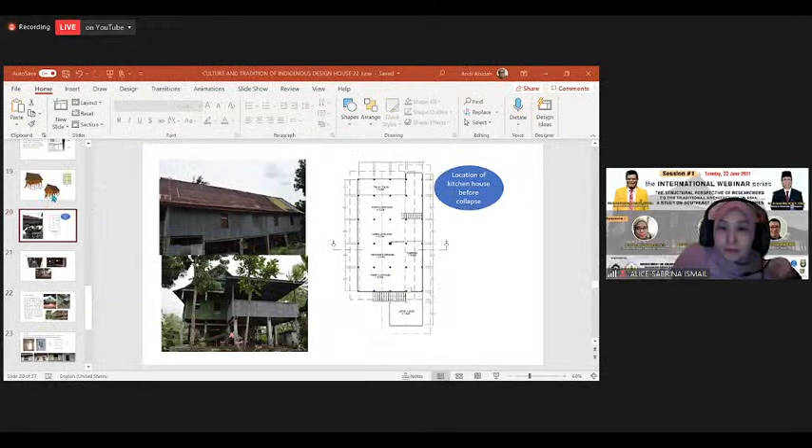Thank you, Professor Alice. Can you give me a star? Kelihatan, Ji?

Thank you very much. I would like to explain my research about the culture and tradition of indigenous house design.

This is Indonesia. Indonesia consists of so many islands and so many tribes. According to data from the World Bank, there are 1,300 ethnic and sub-ethnic groups in Indonesia.

This is Sulawesi. My research is about Sulawesi Island, specifically in South Sulawesi, in the locations of Soppeng and Kajang. I will compare two ethnic groups in South Sulawesi: Kajang Dalam of the Ammatoa Kajang tribes in Bulukumba Regency, and Bugis-Soppeng in Soppeng Regency.

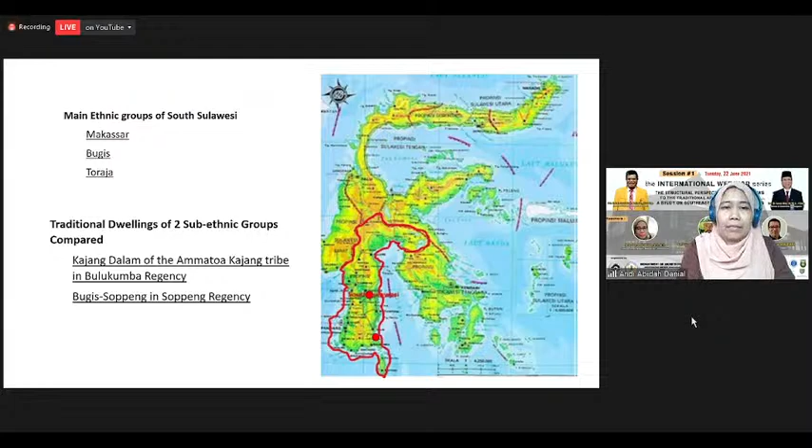Tradition and culture: dwellings embody human interaction with the temporal and spiritual. Construction and traditional dwelling of both the Kajang and the Bugis are considered a ritualistic rite and customary role, used to deal with all aspects of the form and elements of the house, such as size, orientation, construction material and method, shape and position of window, door, kitchen, and staircase.

Kajang Dalam has remained virtually undiluted by external social, political, and economic change, influenced by deep spiritual and cultural connection with their environment. There is strict adherence to customary rules passed down orally, called Pasang ri Kajang. Houses are considered embodiments of the Pasang ri Kajang, which regulates every aspect of life.

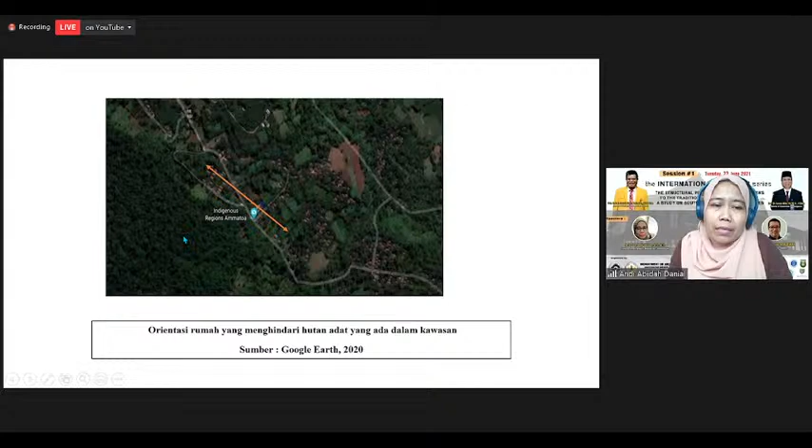The Bugis houses changed orientation three times. When Hindu, the home orientation was north. When Islam came in the early 17th century, houses faced west toward the Qibla. This was the home orientation of Bugis houses oriented to the Qibla.

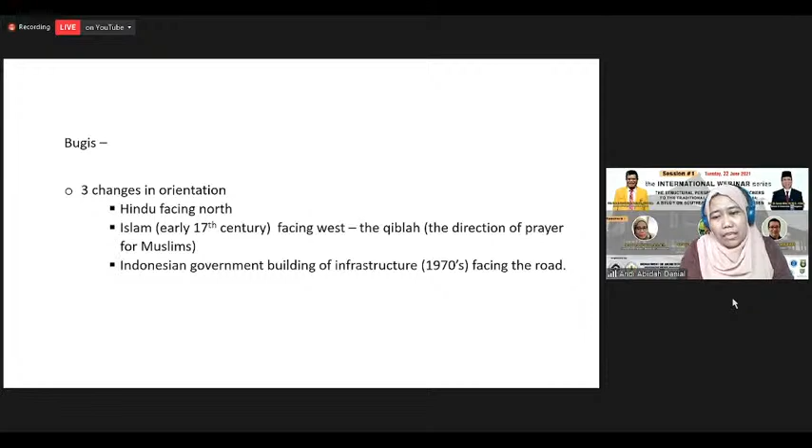Then the Indonesian government built infrastructure in 1970. The housing regulation required all houses to be oriented to the road.

This is a new settlement that came in 1970. We can look at the orientation - the settlement is not oriented to the Qibla, but the home orientation is to the road. This is also Kampong Laringgi, another new settlement. The owners, the hosts, do not orient to the Qibla, but to the road.

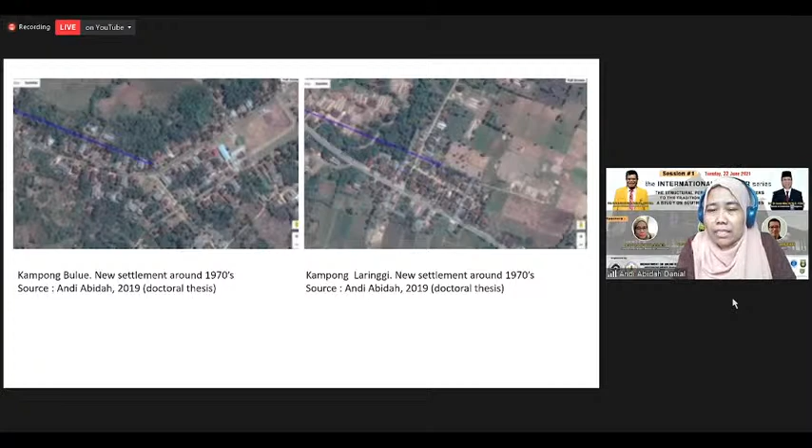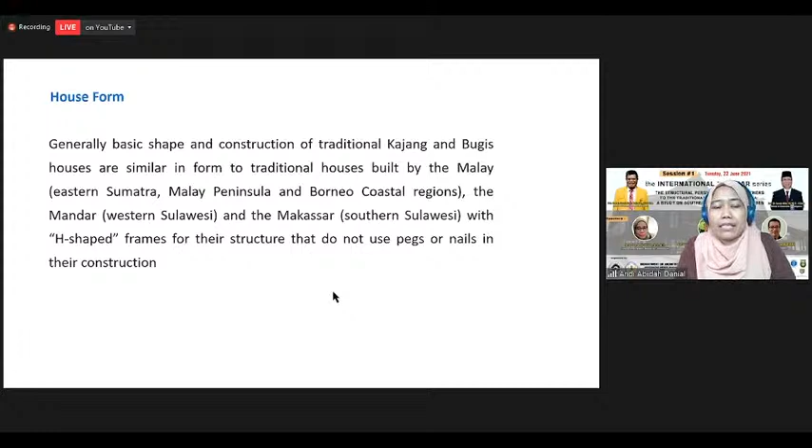House form: generally the basic shape and construction of traditional Kajang and Bugis houses are similar in form to traditional houses built by the Malay in Eastern Sumatra, the Malay Peninsula, and Borneo coastal regions, as well as the Mandar in Western Sulawesi and Makassar in Southern Sulawesi, with their H-shaped frame structures that don't use pegs or nails in their construction.

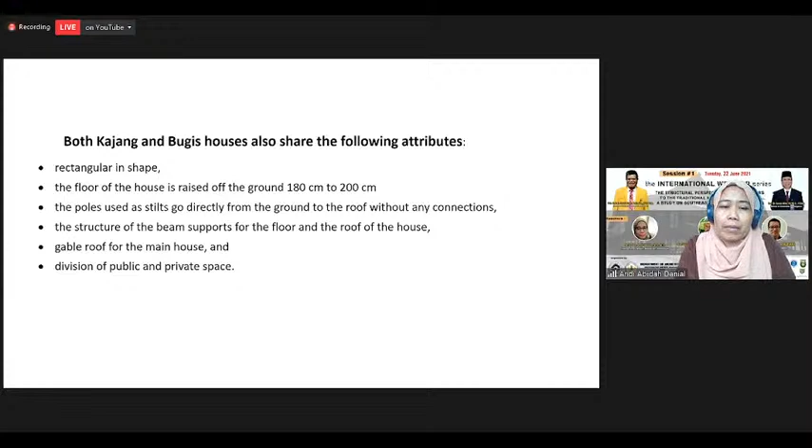Kajang and Bugis also share the following attributes: rectangular in shape. The floor of the houses is raised off the ground 180 to 200 centimeters. The poles used as stilts go directly from the ground to the roof without any connection. The structure has beams supporting the floor and roof of the house, a gable roof for the main house, and a division of public and private space.

Dimension: house dimensions are based on the dimension of the human body. The master builder will set the size of rooms and heights of windows based on the owner's own body measurements. The anthropomorphic rites of indigenous dwelling remain deeply ingrained into both Kajang and Bugis culture, even today, with the underlying belief that these rites unite the house and the soul of its owner.

Measurement: the husband's body is sometimes used, and sometimes the wife's body measurements are used, based on a hand span, the span of both hands together, arm span, leg length, finger length, and thumb length.

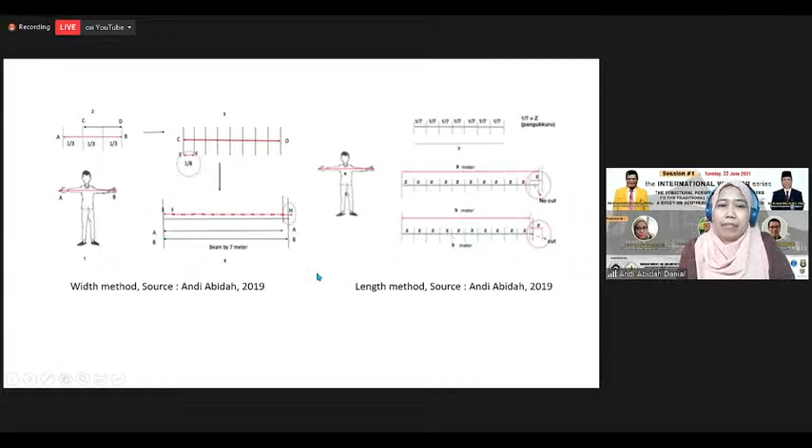This is the method to take measurements for the house - this is for the width, this is for the length. This method is called Kajang Dalam range measurement, the same as the width called Lura in local language.

It measures 190 to 350 centimeters, and the length is called 'latte' in local language, usually called latte by local people. This measurement is 250 to 344 centimeters.

A small dimension house is 2 lura by 2 latte, with a rice storage area called tala-tala along the back. A large house is 2 lura by 3 latte, with rice storage tala-tala along the back.

But in Bugis, the range of measurement for width is called latte, while in Kajang the width is called lura - measuring 114.5 to 244 centimeters. The length is called lontang in Bugis, but in Kajang dalam it's called latte or lanta.

The dimension of a Bugis commoner house is small, 2 latte by 2 lontang with a small veranda level. Middle class is 2 latte by 3 lontang with a veranda. The highest level of aristocracy is 3 or more latte and 4 or more lontang with a veranda and lego.

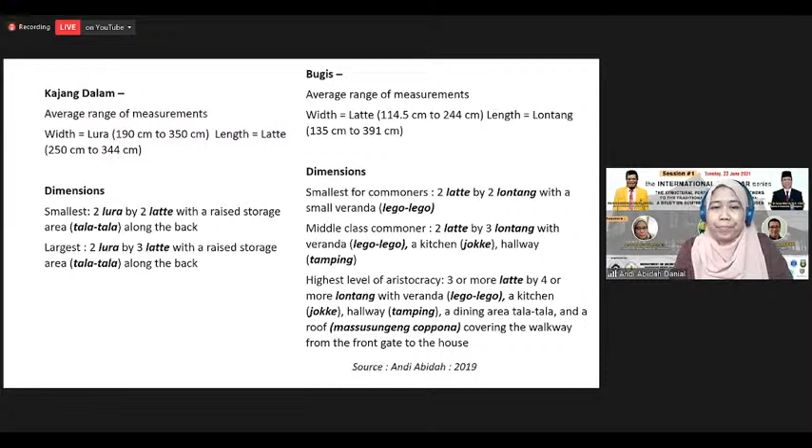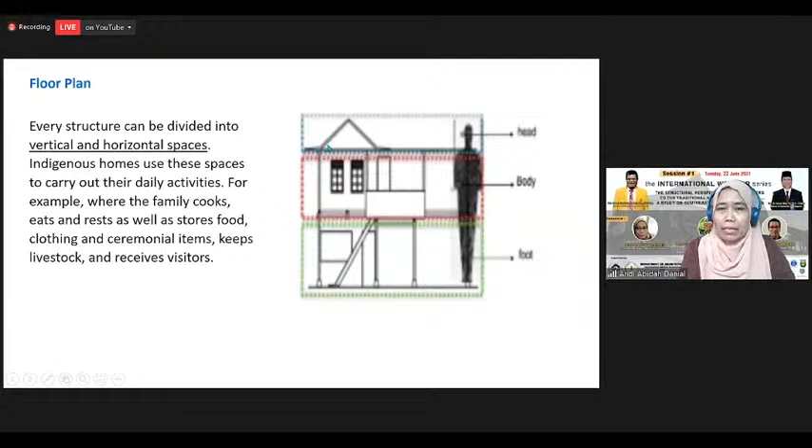This is a form of a Bugis house, and also the same in Kajang dalam. This is the Kajang dalam house, the house of Kajang dalam.

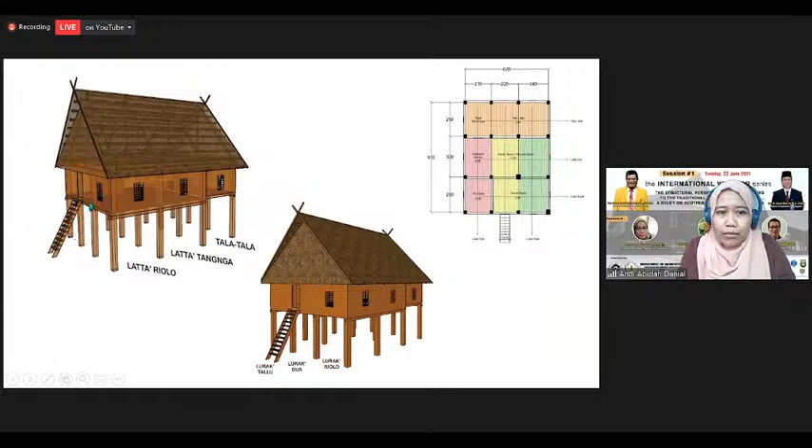This is the order of rooms, and this is Bugis. This is the tala-tala - in Kajang, this is also called tala-tala. They didn't use a lego connected directly to the main house, but in Bugis there is a lego, with all the stairs landing at the lego.

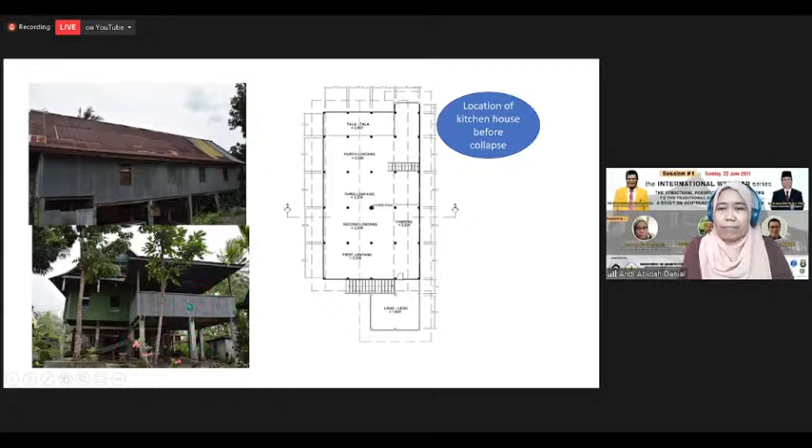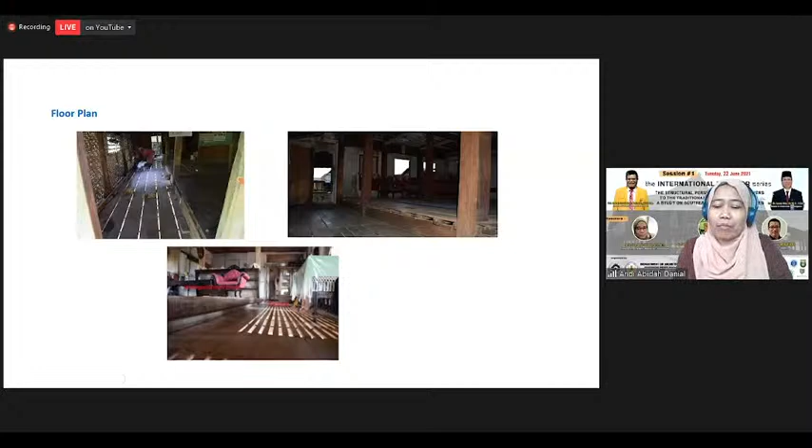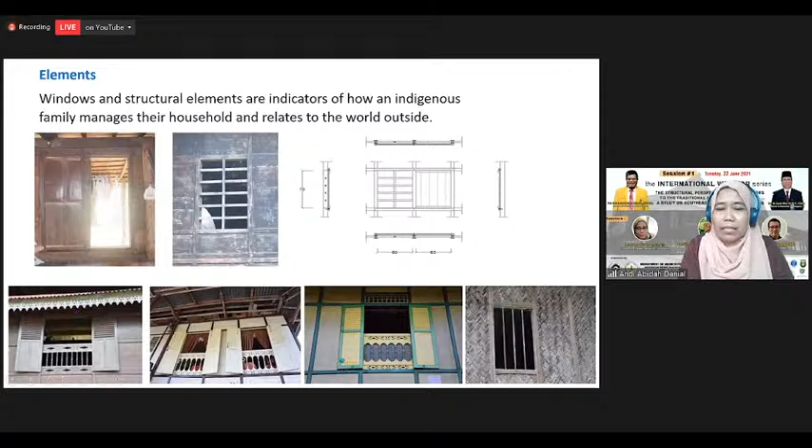In Kajang Dalam, due to the communal dynamic of the Kajang, social harmony is achieved through living in symbiotic relationship with nature and each other. There is no ornamentation used on the houses nor on the people themselves, as every citizen has only a limited number of outfits woven, solid black, and sewn by the female members of the tribe.

For the Bugis, ornamentation is not just an aesthetic enhancement. Every aspect, from the placement to what it looks like, to the material it is made from, can indicate the owner's social rank and what area a visitor may occupy according to their social rank.

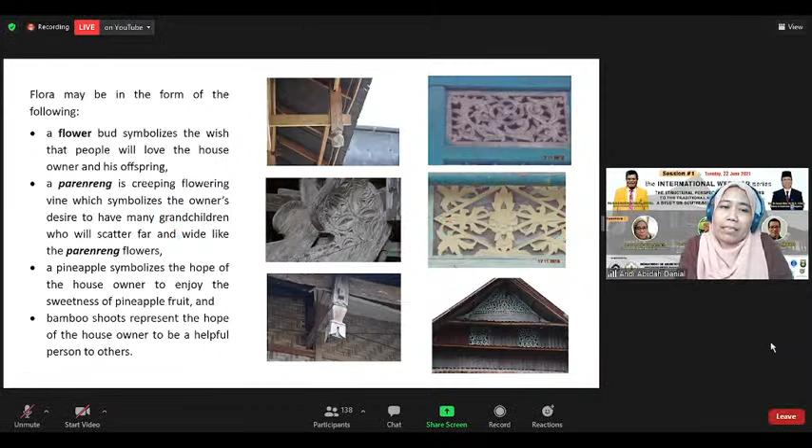This is communal but shows different levels of social rank within society. Flora might appear in the form of the following flower. This is a flower motif, symbolizing the wish that people will love the house owner and his offspring. This is the parenreng flower, a creeping flower vine which symbolizes the owner's desire to have many grandchildren who will scatter far and wide, like the parenreng flower.

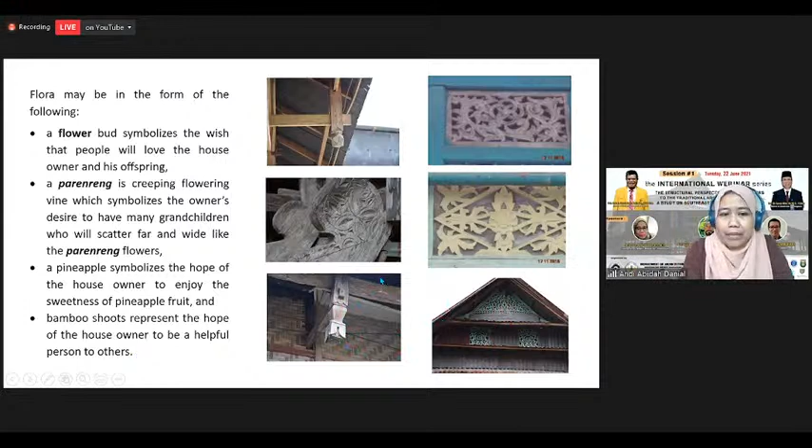I don't have a sample for that one. I think thank you very much for your attention to my presentation. I will hand it over to the moderator.

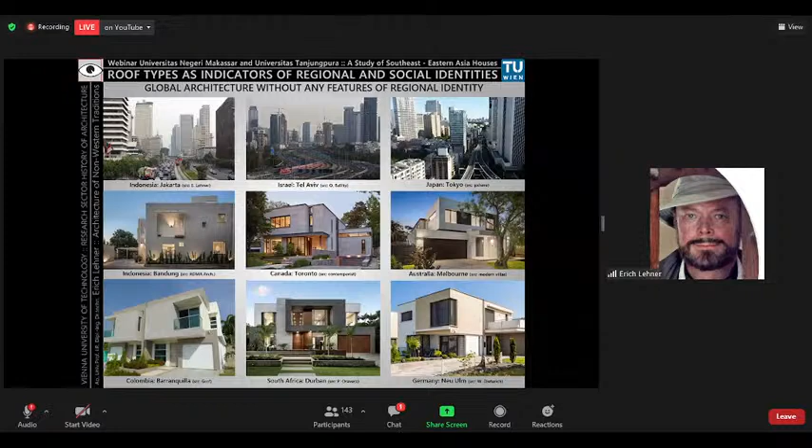Here I show examples from Indonesia compared to examples from North America, South America, Australia, Africa, Europe. There is little evidence of an Indonesian architecture there, or even an architecture of a particular region on the various Indonesian islands. And a comparison of religious architecture, certain types of buildings also fall in this category. How does an Indonesian mosque, for example, differ from a mosque anywhere else in the world?

Differences are not particularly pronounced, and a regional or Indonesian architecture hardly exists here. These are, after all, important forms of architecture.

However, the situation is completely different in traditional vernacular architecture. Here there are very specific characteristics which decidedly indicate regional identity, the identity of particular ethnic groups and regions. Nevertheless, there are also common features that apply to most, not all, traditional housing types. In this lecture I will focus not only on the differences, but also on the similarities of this traditional architecture. Particular emphasis will be given to the roof.

The tripartite structure. Tripartite is a consistent characteristic of a predominant number of building types of vernacular and also sacral architecture of Southeast Asia. There are three levels, three spheres. And in the old religions of Southeast Asia, Hinduism and Buddhism, the tripartition is found. The world, the cosmos, is divided into the spheres: underworld, earthly world, supernatural world.

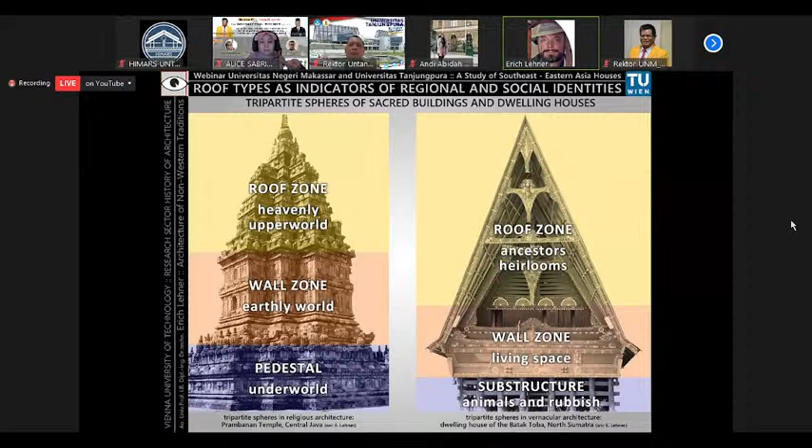A high-standing person does not mean a person standing on a table or a ladder, but a person of high rank. The high society is the higher ranking social class. The upper 10,000 carries the same social meaning. The social meaning of the term high is also often implemented in a physical way.

The ruler sits on a high throne above his subordinates. Please note also the word subordinates here. The lower ranking persons prostrate themselves in front of high ranking persons, and in some societies those of lower rank may only approach those of higher rank by crawling on the ground.

The conclusion: the elevated position of a human being, of an object, of a component, is an expression of its rank. The value of components is increasing from bottom to top. The uppermost component of a building, therefore, is the highest ranking. And it is the roof.

A comparison between the house and the human being, the tripartite human, the tripartite house - these comparisons are not new. You can find them in both historic and more recent literature, and actually also with the body structure of human beings. The tripartiteness is present and addressed.

The tripartite human body is the head, the trunk, the limbs. In the limbs, there are no organs. In the trunk, all the organs except the brain. And in the head is the most important organ, the brain, which makes the individual a human being in the first place.

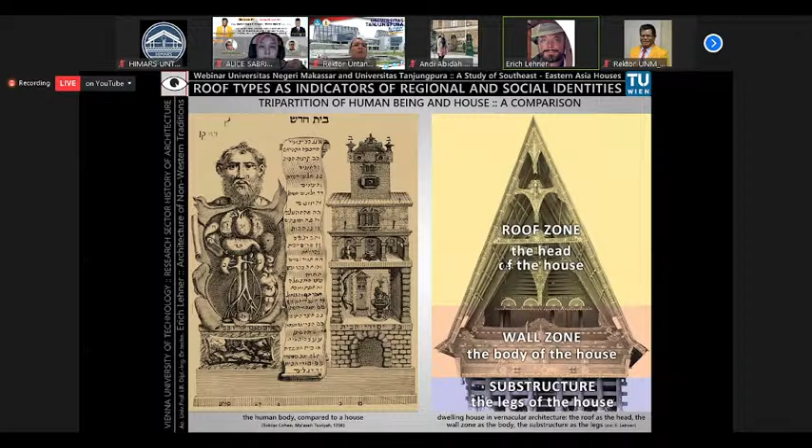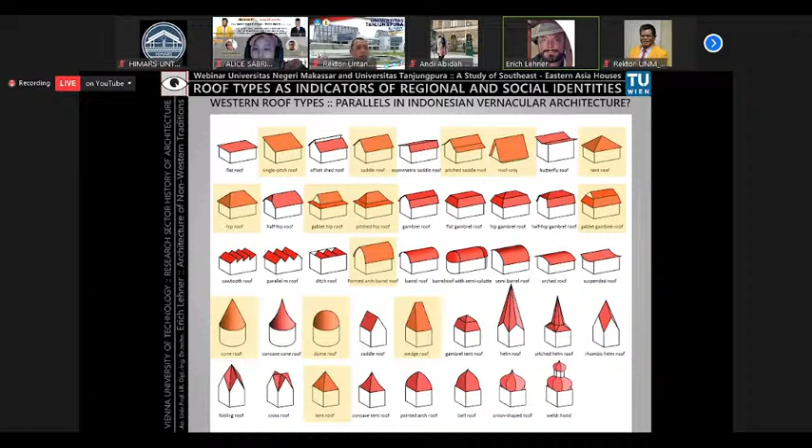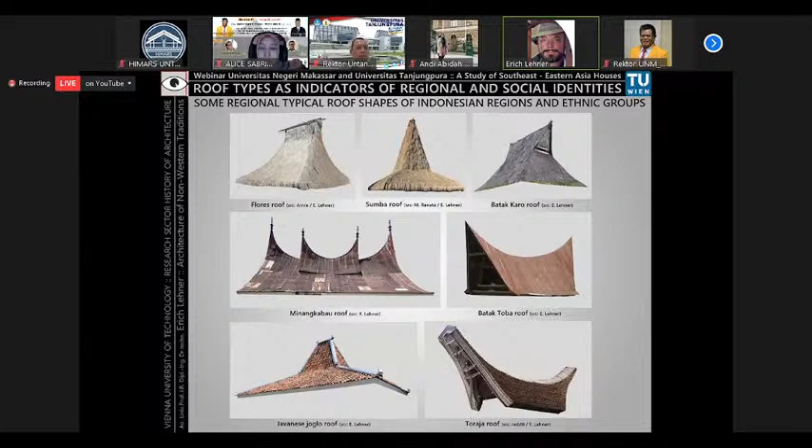In many of these special roof types, general criteria can be detected which allow further conclusions about the meaning of the corresponding roof form: it is height, it is symmetry, and it is the multi-part roof surface. Yet you see, sorry, I missed to take the right picture. The height - what about the height?

Introduction: the height of the roof is a characteristic for various meanings. It is an expression of a certain regional identity, and an expression of prestige within a regional building style. The height concerns first the relation of height to other structures - the tallest is almost always considered the most significant in traditional architecture.

Second, the proportion of the structure - tower-like structures are of particular importance. And third, the position of the structure or part of the structure. The most important structure in traditional architecture usually is the highest part of the structure, and the highest part of the building is the roof. The roof is a symbol as a feature of identity and rank of the building.

I will show this later on, by the way, with a comparison with head coverings in traditions of various cultures - the high caps in traditional costumes, for example, in Sulawesi and Kalimantan.

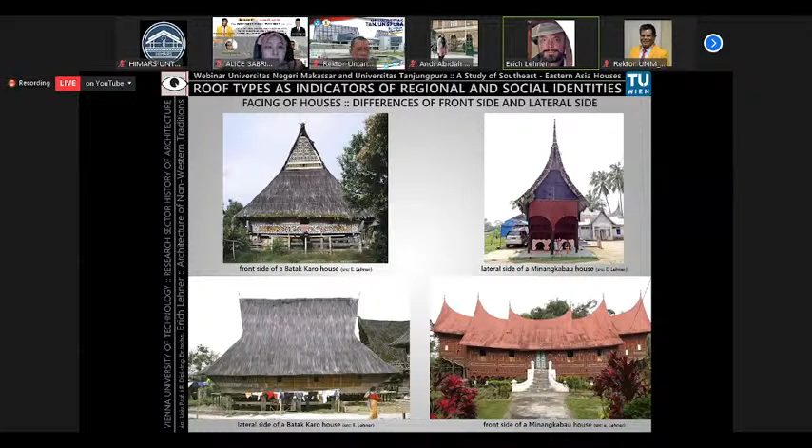The counter example, you can see it on the right side, the Minangkabau. Here, the show facade is on the long side of the roof. In this case, a ridge of the roof on the long side is particularly emphasized and raised by upward soaring multiple gable peaks, which has a special symbolism for the identity of the people of the Minangkabau.

The exaggerated elevation of the roof on the front side is seen in some traditional building cultures, where the gable of the roof is exaggeratedly raised at the front side, giving the building a particularly imposing appearance. You can see it in the Toraja in Sulawesi, with both gable ends extremely strongly upswept, and in the Batak Toba in North Sumatra, also with a strong upsweep.

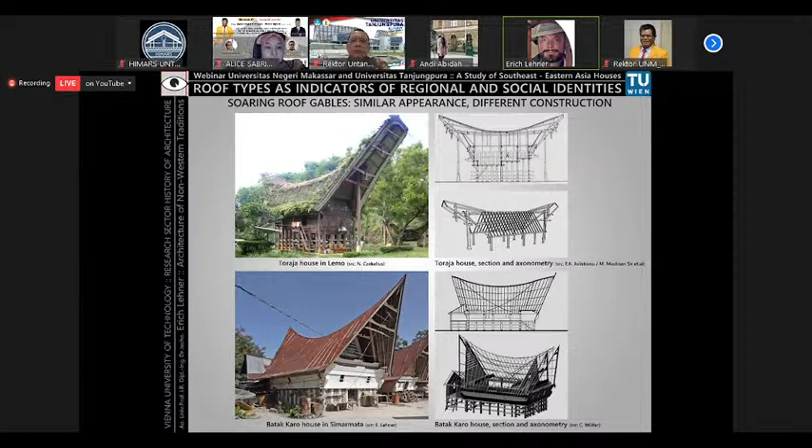It is clearly recognizable that this upsweep is not due to construction but is a design and formal reason. For the Toba Batak, the sagging ridge is not really a constructional problem, and at the Toraja, the roof upsweep has to be achieved by additional, structurally unnecessary support.

A characteristic and unique appearance of traditional settlements of the Batak Toba people in North Sumatra and the Toraja people in Sulawesi is created by rows of widely projecting, soaring roofs. These roofs dominate the image of the settlement, so the roof shape is decisive not only for the identity of the house, but also for the identity and regional affiliation of the settlement.

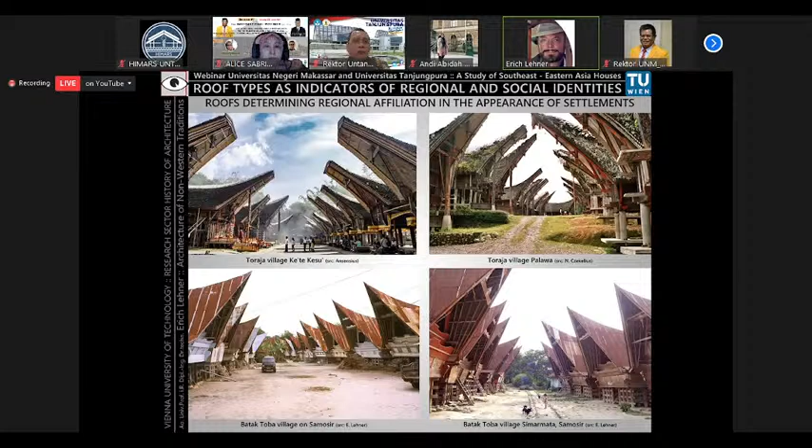In the example of the Toba Batak, the decoration of the roof area is often a main feature for the appearance of individual buildings, and prominent buildings have an extreme decoration. Above the building, the gable zone shows the rank of the house, and often also determines the individual appearance of a certain building.

Interestingly, the decoration is often applied only at the entrance side, usually the front side of the building, the show facade. Here in the Batak Toba area, the decoration in the gable field of the entrance side is much more elaborated than at the rear side. The front and rear are characterized by different appearance, expressed above all in the abundance of decoration.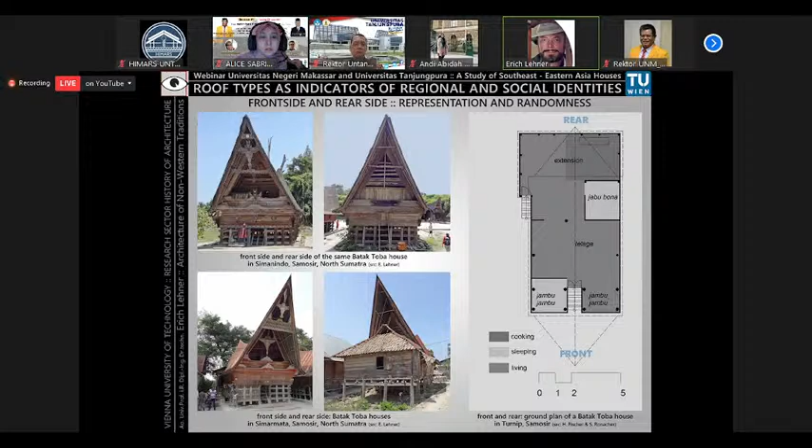Decorative elements in the roof area can be found at the highest point: buffalo heads in Karo or Simalungun houses, a symbol for the protection of the house and the well-being of the inhabitants; buffalo horns in Minangkabau houses; and the crown of the roofs on hierarchically higher buildings in Bali.

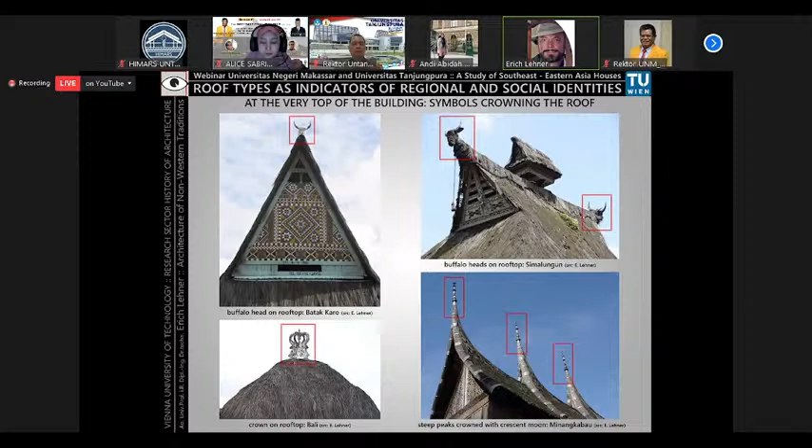The hierarchy of symmetry: symmetry is a very important feature of prestige in general building, and in traditional architecture it is also a characteristic of beauty. The origin of the word symmetry is the ancient Greek word symmetria, meaning balance, harmonious and beautiful proportions, and equilibrium.

Most buildings in Indonesian architectural traditions are axially symmetrical, meaning symmetry is related to one of two main axes. With an increased prestige of building types, an axial symmetry can also develop into a double symmetry, as seen in the picture below, for example in the Karo Batak building type.

Continuing with the Batak Karo, the traditional Karo Batak dwelling house is characterized by an incredible height of the roof area. In the interior, the headroom to the beams is approximately 15%, and the height of the roof is approximately 85% of the total height. In the exterior, the substructure is approximately 10%, the wall zone is approximately 10%, and the roof zone is approximately 80% of the total height.

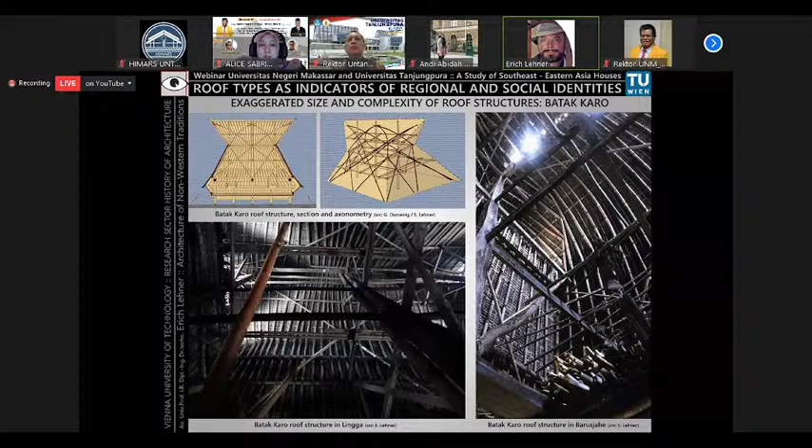Clearly visible in the axonometric drawing, the roof construction is rather complex. The hierarchy of the buildings is not only expressed by the height of the roof but also by its complexity. The more prominent the house, the more complex the roof structure, and above the actual roof, another roof is constructed.

This is actually a scaled-down model, rumah anjong, of a traditional Karo house, and in extreme cases, several of these house models are placed on top of each other on the roof. You can clearly see the priority of these buildings - the more prominent houses, the more prominent in the village - with the assembly houses or community houses as landmarks of the community, being the most prominent examples.

The hierarchy of buildings is also expressed by double symmetry, the all-round symmetry. In prominent, centered buildings, this is particularly noticeable in the roof zone.

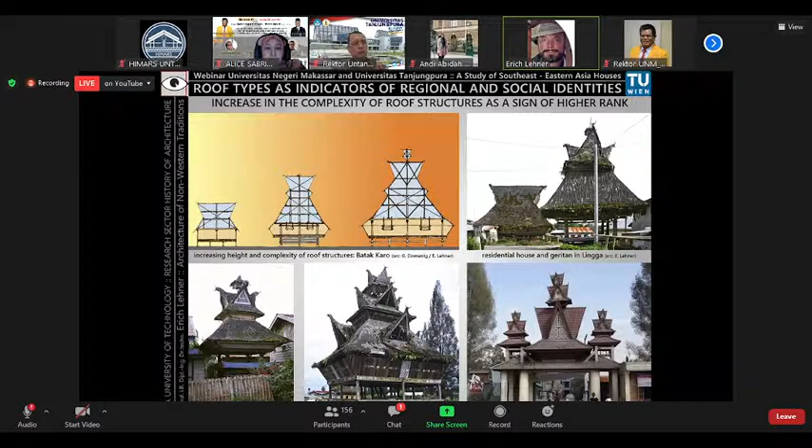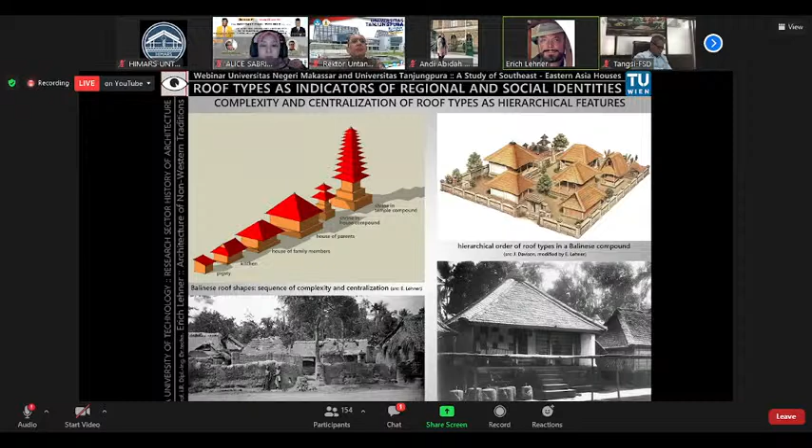The next higher rank is the family members' dwelling, with a hipped roof of 4 surfaces. The next higher rank is the parents' dwelling house, a pyramid roof with 4 surfaces centered on a point. And the highest rank is the family temple on a high platform, with either a pyramid roof or multiple pyramid roofs, 8 surfaces. This system of superimposed roofs culminates in the Balinese temple complex.

Simple shrines have, for example, 2 roofs on top of each other. Other higher ranking shrines dedicated to corresponding higher Hindu deities have 3, 5, 7, 9, or 11 roofs superimposed. The more roofs, the higher the rank of the shrine.

But such expression of building hierarchies in the type of roof shape is not limited to traditional architecture on the islands of Sumatra and Bali. This principle is obvious also in other building cultures, for example in Europe. I'll bring another example from an Indonesian island, Java.

In Java, traditional architecture of central Java also expresses different ranks of building types in different roof shapes. The Panggang Pe roof, a monopitch, is typical of lower ranking buildings. The Kampung roof, a gable roof, is characteristic of simple dwellings in the village. The Limasan roof, a hipped roof, is typical for dwellings of higher ranking persons in the countryside or for townhouses.

The Joglo roof, a multi-part hipped roof, is the highest rank dwelling house for the upper class and important public buildings. The Tajug roof, usually a multi-story pyramid roof, is for religious buildings. In terms of complexity: one face, two faces, four faces, the Joglo 8 faces, and the Tajug with 3 superimposed roofs has 12 faces.

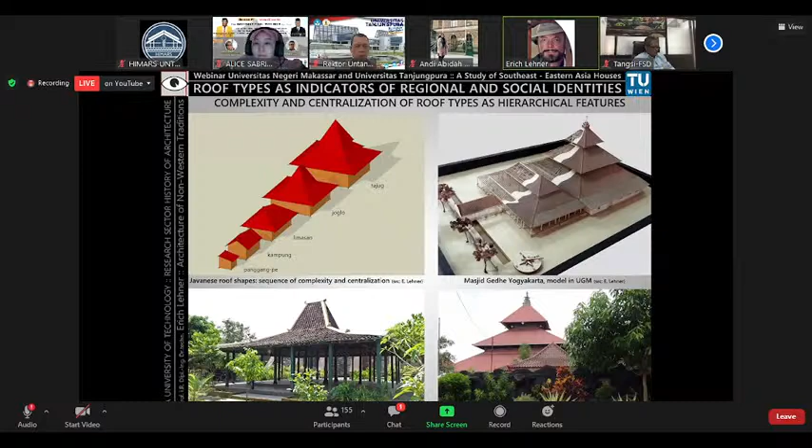The highest culmination of meaning is seen in the centrality, height, and slenderness of the roofs of traditional dwellings on Sumba. Here too, the house is divided into three parts: the substructure for animals, the living space as the sphere of humans, and the roof zone as the sphere of ancestors and ghosts.

The core zone of the house, with the hearth at its center, has a sacred character in Sumba. The living area arranged around the core zone is of lower rank. In the external appearance, this hierarchy of spaces is clearly expressed by the shape of the roof: the higher valence of the central area is shown by a very steep roof rising high like a tower, while the lower rank living area has a much flatter, low ring-shaped monopitch.

What about the roof, finally, as a factor of identification? What do you see when driving through a town such as Bukittinggi in West Sumatra? You see roofs, roofs, roofs. For those who still don't believe that traditional roof shapes are an essential factor in marking regions and ethnic groups, here are a few pictures of completely crazy objects where the importance of a certain roof shape is illustrated in an exaggerated way.

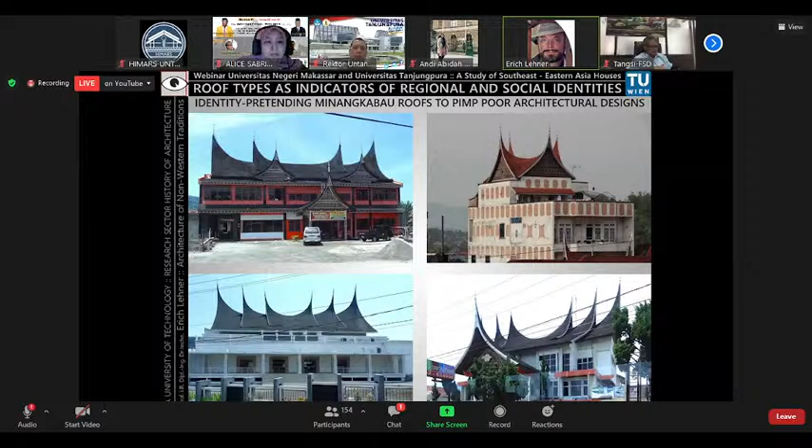If you have a building that looks very boring or has an identity-less, miserable design, then put a prominent roof on it. And to let people know what region you're in, mount a traditional roof that marks the corresponding region and emphasizes the corresponding culture—here, Minangkabau. It is incredible what crazy ideas architects have when nothing else springs out of their brains.

And if you are driving on a road somewhere in Indonesia and don't know where you are, a gateway will clearly tell you. Even without labeling, the shape of the gate unmistakably shows the region by its attached roof. According to the traditional style of the local architecture, you are either in the region of the Minangkabau, the Batak Karo, the Batak Toba, or in Java.

And if you don't know where to have dinner tonight and which dishes are available in which restaurant, the traditional shape of model roofs mounted above signboards and restaurant entrances tells you without a shadow of a doubt. It's apparent why Padang food is popular in Minangkabau, but not only there—it's also often found in Java and on other islands.

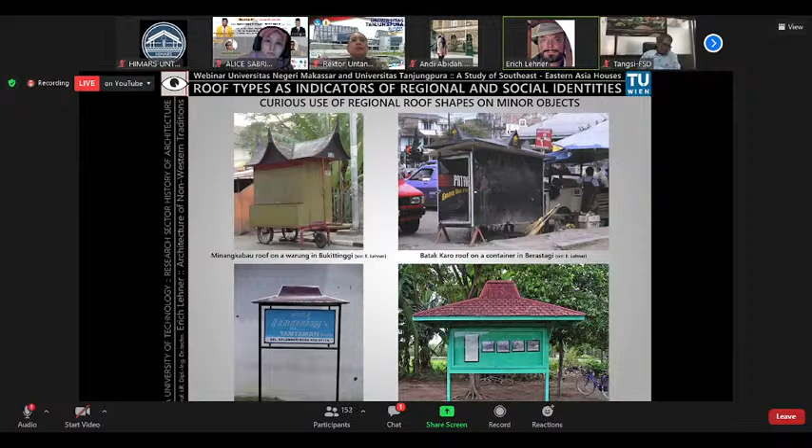In conclusion, in this lecture I tried to outline the characteristics of roof types in various building cultures of the Indonesian archipelago, in a very abridged way. I shortened this lecture down to nearly nothing. What I attempted to show was that the identity of many of these building cultures is expressed essentially through traditional roof shapes, and that in some of these building cultures, the rank of the building or residence can also be expressed by certain roof shapes.

And at the very end, I would like to ask a question: how can we apply all this knowledge in the future when we are only building houses with flat roofs? Thanks for your attention.

All right, thank you very much, Prof. Lechner. That is a very interesting lecture, especially on the symbolic elements of roof design as an expression of social identity. I really like the beautiful images of roofs captured in your slides. Personally, I've never been to Indonesia yet, to any of those places, but it is a very beautiful image of the roof design and houses. It looks like the topic was timely, and you presented the material and the new innovations in a way that everyone could understand. The insightful presentation had given a new dimension in appreciating traditional architecture that can be integrated with modern society, namely for the benefit of the new generation.

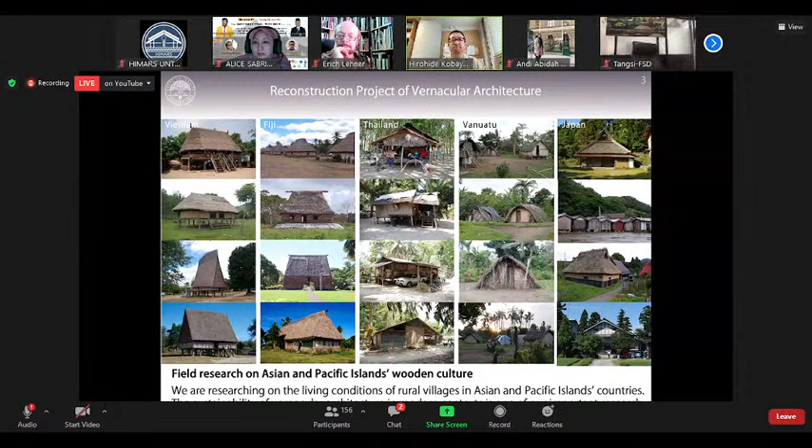The vernacular architecture expresses local identity. However, it is disappearing due to modernization and the market economy, even in remote islands. In remote villages in Vietnam around 2004, they kept a very traditional lifestyle, but now they have motorbikes, mobile phones, and many modern devices for their life. The reconstruction projects were organized when we met local people who recognized the importance of their own traditional house in modern life.

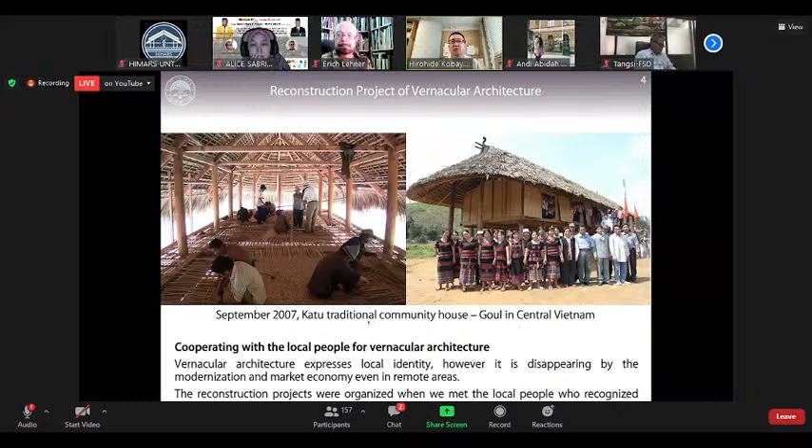The first reconstruction project was conducted in a local village in central Vietnam. This is the Katu ethnic minorities' traditional community house. Then in 2011 we moved to Fiji for a reconstruction project, which is also traditional wooden architecture. This is the project in southern Thailand.

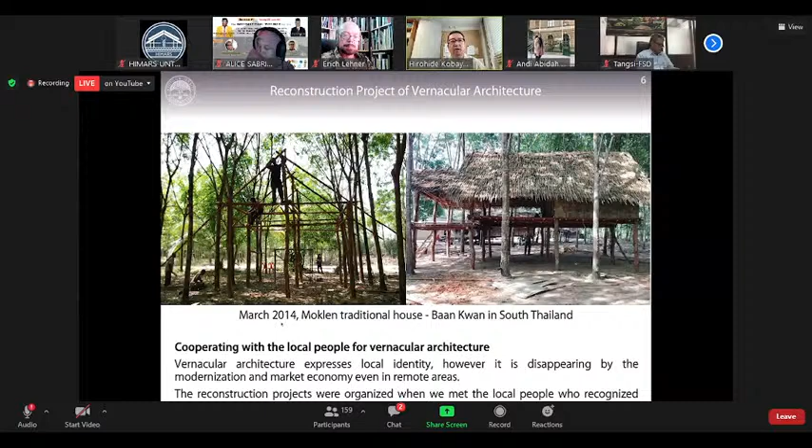This is the Moklen people's traditional house. The Moklen people had to move inland due to the 2004 tsunami disaster. Then there's the project in Vanuatu, and moving back to Vietnam, we organized again the Katu traditional community house reconstruction project in central Vietnam.

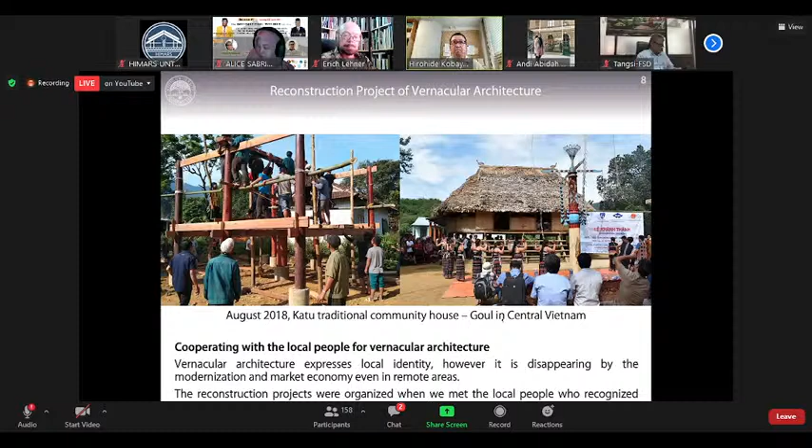I want to show you briefly the first reconstruction project in central Vietnam in 2007. JICA, the Japan International Cooperation Agency, sponsored our project supporting livelihood and safety in disaster-prone areas of central Vietnam, focusing on three pilot projects in a Lagoon Village, a Plain Village, and a Mountain Village. In the Mountain Village, the Katu people live, and we started the reconstruction project there.

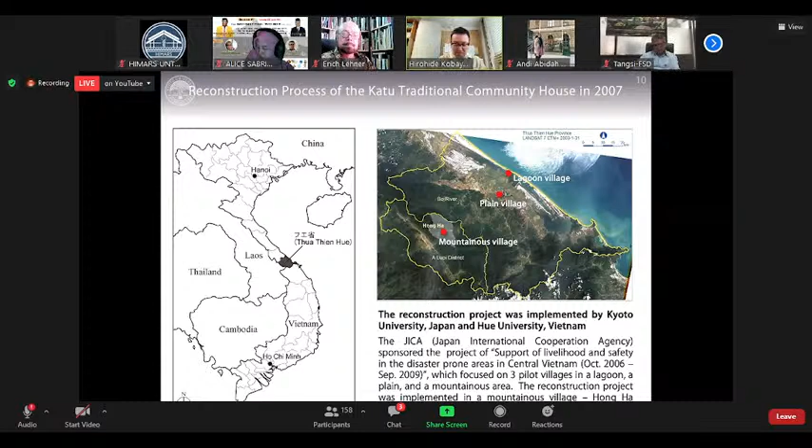The purpose of the project initially was different—we first tried to make a modern house for an evacuation center against flood disasters. But the village leader and the former village leader seemed unhappy about having a modern house, and they instead demonstrated a desire to build their own traditional house. There was a reason why they had no chance to build their traditional house: because of the Vietnam War.

Since 1975, at the end of the Vietnam War, they had to relocate to certain areas designated by the government, and so had no chance to have a traditional house.

So our project team recommended they start the reconstruction project, working together with them. This involved collection of wooden material, transportation by buffalo, logging and processing, and a ceremony to start construction. All of the local people came together for the main structure, building it without nails, using only ropes and bamboo, followed by the roofing.

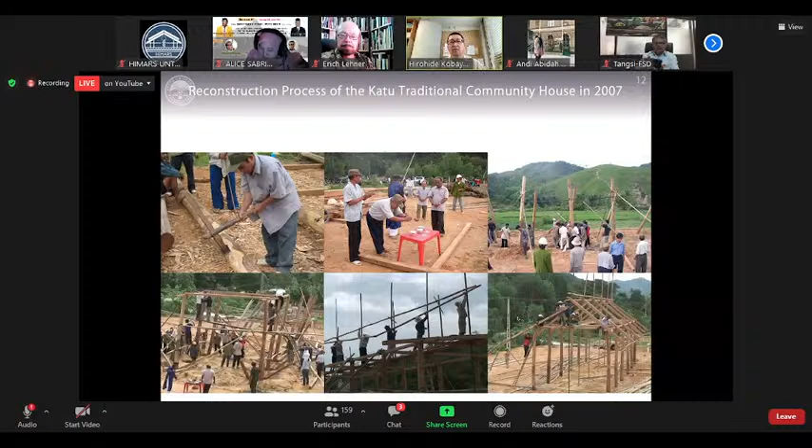They have a very high technique to make units of the roof, then slide them up into the roofing part. They also have a high technique for weaving the bamboo screen.

Finally, one elder person makes the ornament on the top of the roof, and the elderly people also put in the central pillar, completing a final ceremony. The project cost only 3,000 USD because through community cooperation, they don't exchange money—they just contribute labor. But we had to pay 3,000 USD, most of which was used for the buffalo for the sacrifice ceremony.

In these reconstruction projects, I found three local resources for vernacular architecture. The first resource is, of course, natural material—they use a lot of natural materials.

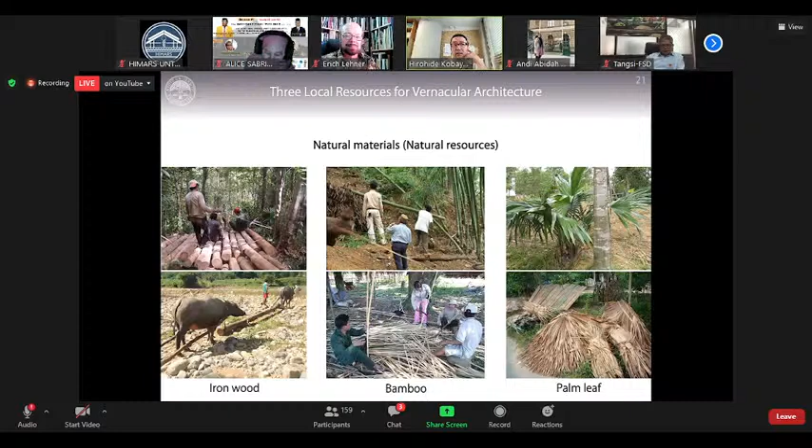And the second one is community cooperation. So I want to call it the human resources. All of the villagers, they work together without money, for the construction.

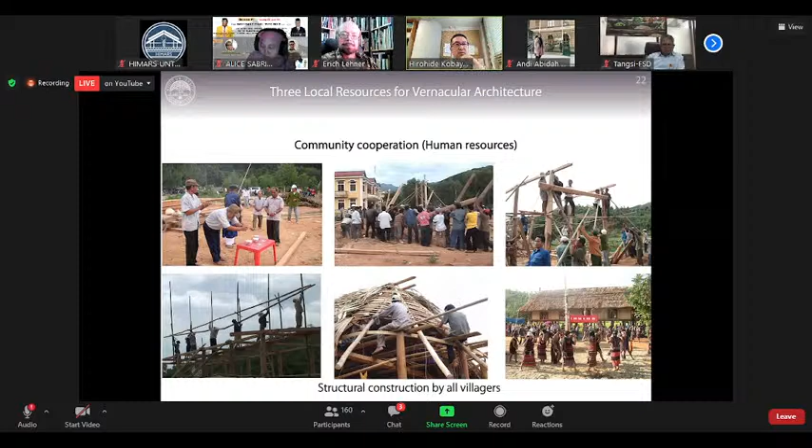And the last resource is indigenous knowledge. As I told you, they didn't use any nails for the connection, and they use a very high technique for the exterior wall and the roofing. And then also today's topic, the design method by the body-based unit of measurement, is also one of the indigenous knowledge.

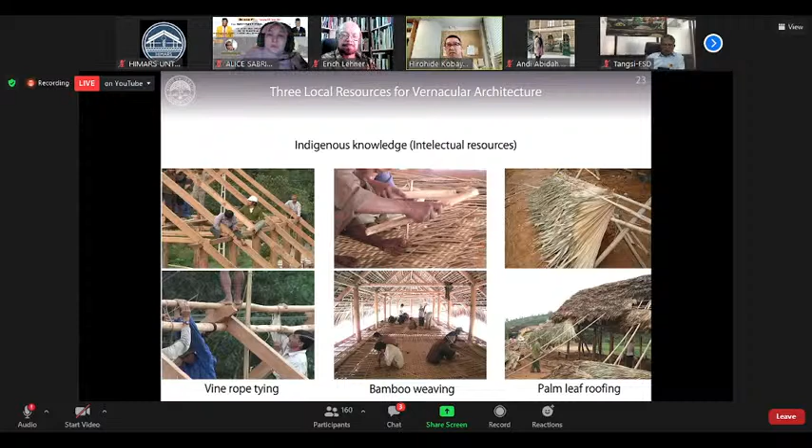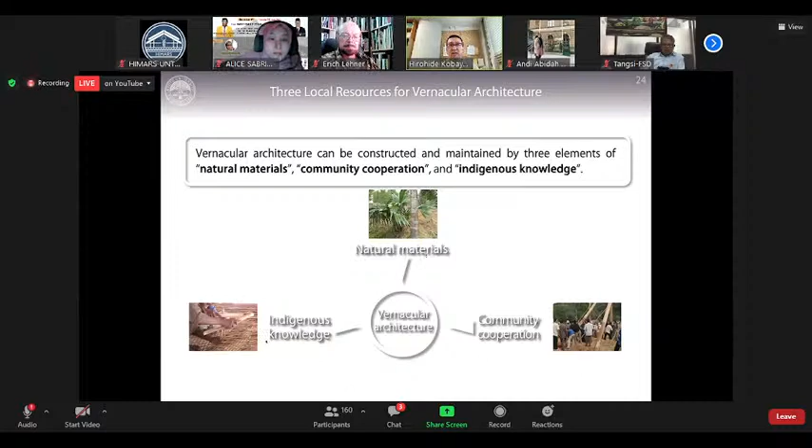So I understand the vernacular architecture can be constructed and maintained by 3 elements: natural material, community cooperation, and indigenous knowledge. And each of these 3 elements belongs to natural resources, human resources, and intellectual resources.

These 3 resources interact with each other. For example, a community gets the benefit from the surrounding forest and field. And the local knowledge and technology are transferred, and the forest resources are managed for sustainable use by local knowledge.

Overviewing the three local resources, they exist in the local nature, local society, and the local culture, sometimes called local environment. So the sustainability of vernacular architecture deeply depends on the local environment in its area. So this is my understanding of vernacular architecture and its supporting elements.

And then, as I told you, the indigenous design method is a kind of intellectual resource. So this is my main topic in this presentation.

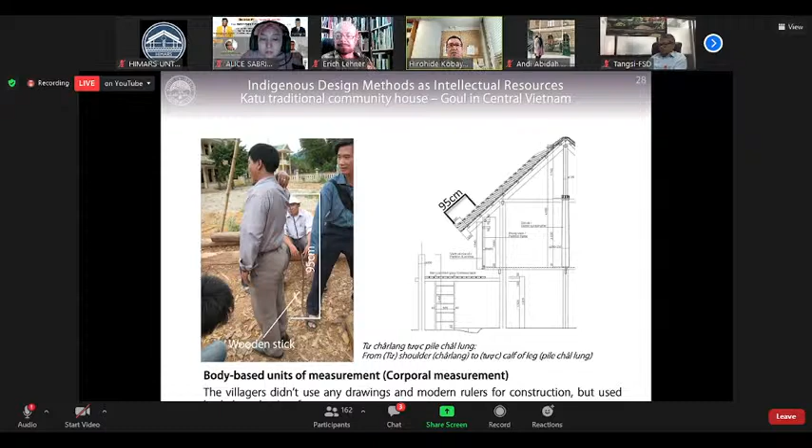So I invited 5 elderly villagers to understand more about the body-based units used by them. Then, as explained by the elderly, from the center of the body to the tip of the hand, he said 'salon.'

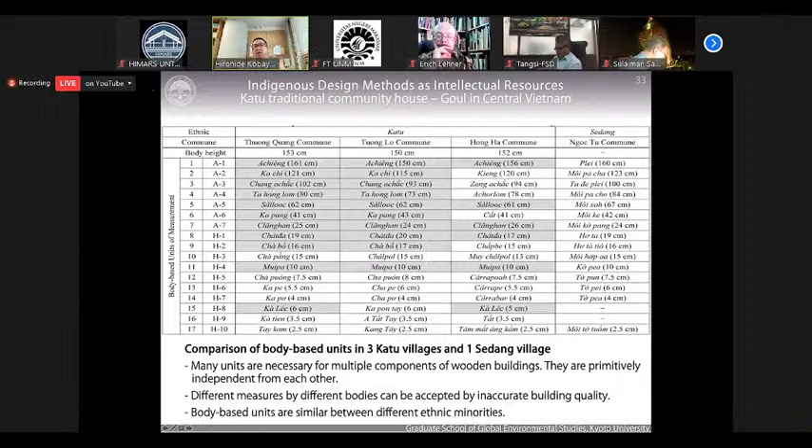So this is the village where we did the reconstruction project. In 2 other villages, a different ethnic group lives just nearby. As you see in this figure, we can find very similar units, but some of them are called differently. But we found mostly the same idea of the body-based unit in the Katu people and the surrounding village people. This is also interesting.

They have some relationship between units. They explain 1 Achiêng equals 4 Cất, equals 8 Chătđa. You understand? So 1, 2, 3, 4, and 5, 6, 7.

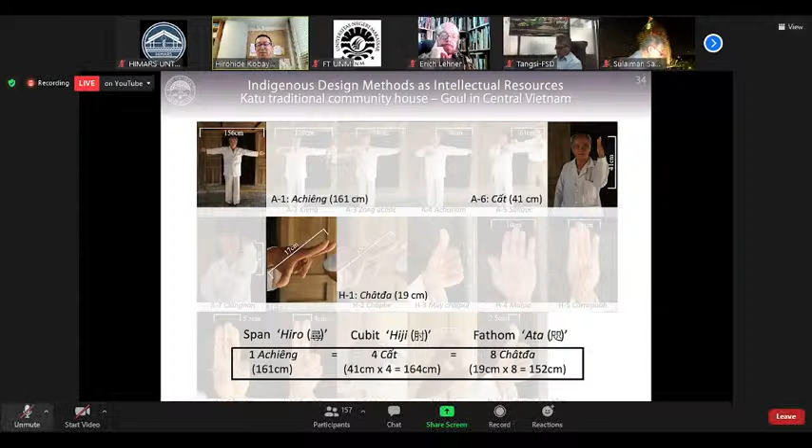So I found the same idea in Japanese traditional houses, primitive houses. It's very interesting, but of course, we don't know how they transferred this information from one place to another.

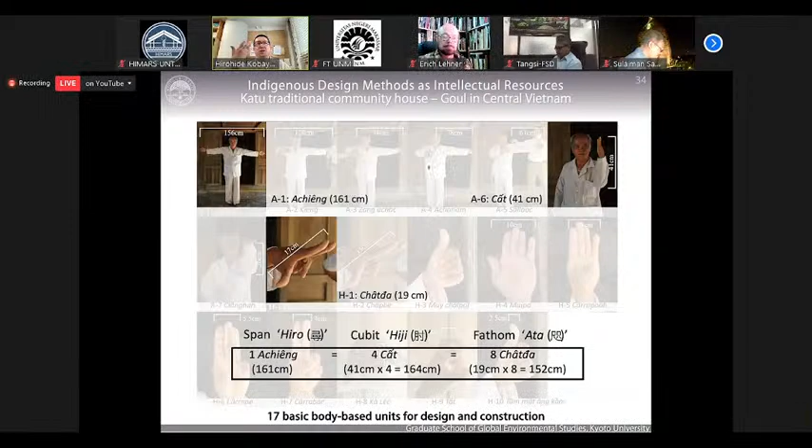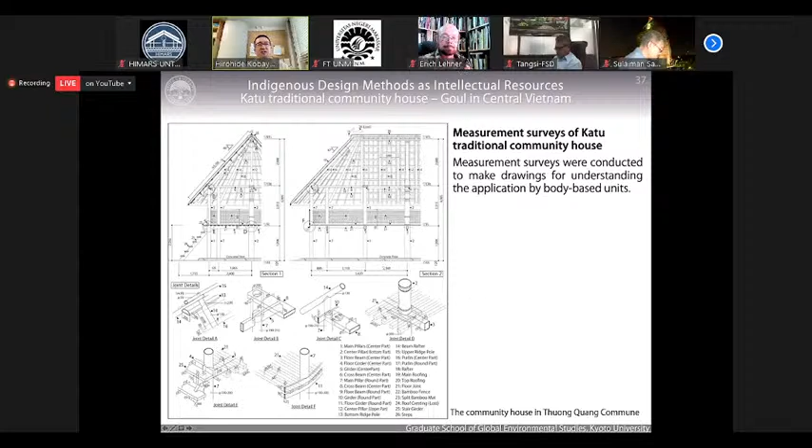So we took the measurement survey of the community house, and then we understood more about how they apply the unit to the actual building. They use the Achiêng plus some other units, depending on the size of a pillar, depending on the size of the house, they explained.

And the section planning is also applied by unit. For example, the floor height is applied by A1 plus A6. And the height from floor to beam is A1 plus A6 as well. And then the full height of the house is 4 times A1, like this.

So of course, they don't use drawing paper. They just put all of the information in their head and body.

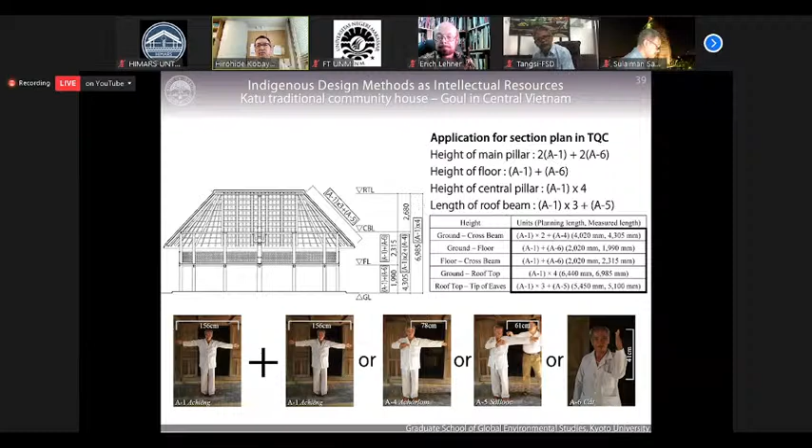And so when they decide the size of material components, they also use the units. For example, for the central pillar, they need 6 times H1 for the round part, the round length of the pillar. And then the standing round part of main pillars is also 4 times H4. And the round length of the roof beam is H1 plus H4. So they exactly remember how they use the unit.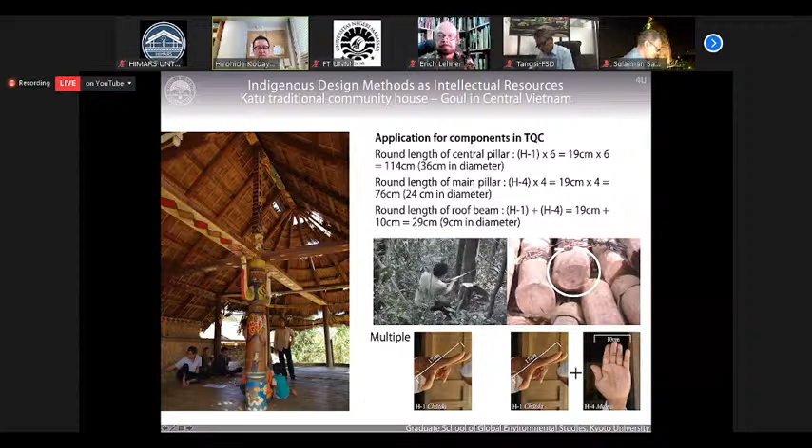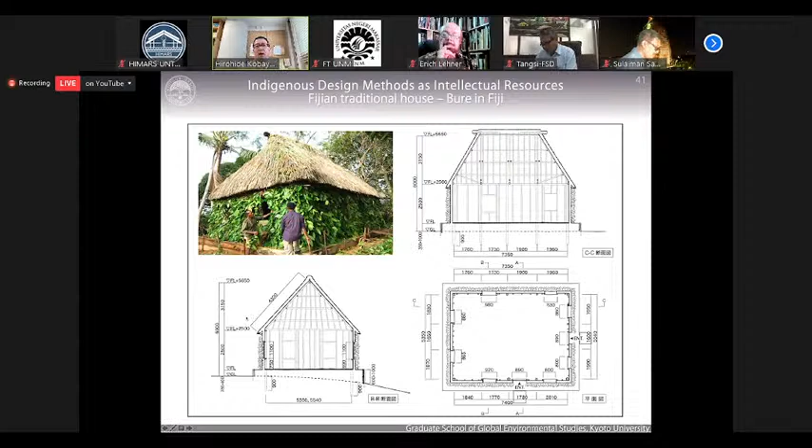And so it was very interesting information for me in Vietnam. And then when we had the project in Fiji, I tried to interview local people about the same technique. They had the same one, but only 7 kinds of unit in Fiji. And in Thailand, they also have 7 kinds of unit.

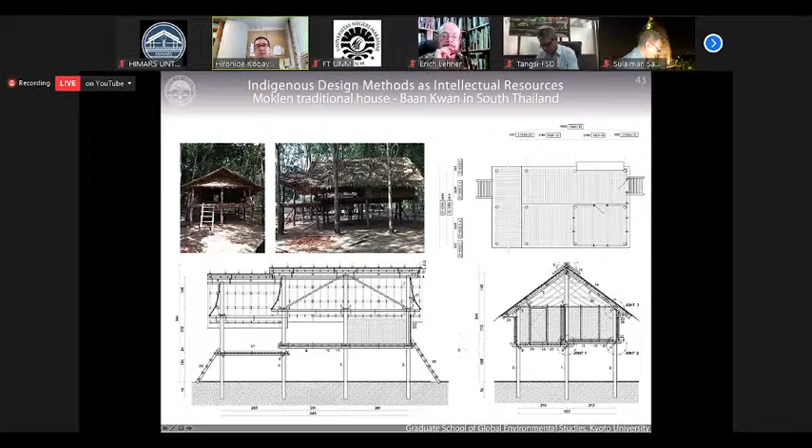And in Vanuatu, it's a very, very simple traditional house, so they just use one kind of step. One step is nearly 90 centimeters to decide the floor area. 3 steps by 5 steps is necessary for the house. And for height planning, they use their body height and the height of the raised hand. It is very, very simple.

So I had the opportunity to do fieldwork in Burkina Faso, West Africa. This was a different type of house, different from the wooden culture house in Asian countries. But I was curious to know whether they use the body unit or not. So how do you think about this?

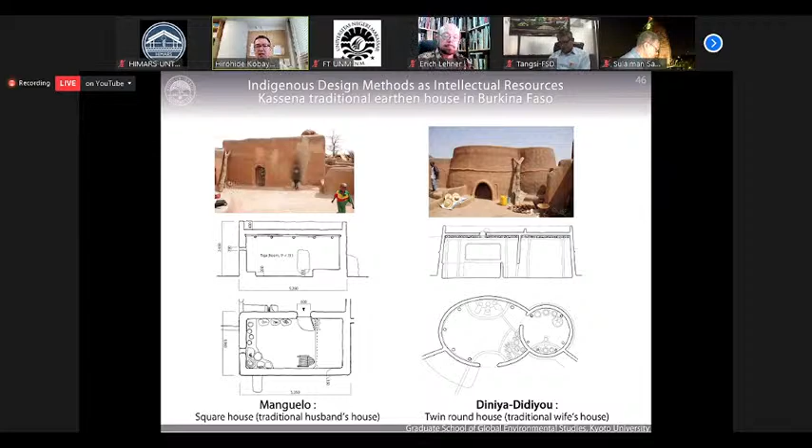Yeah, they also use the unit. You remember the interview video in Vietnam? So he used the same gesture from the center of the body to the tip of the hand. This length is equal to 1 step, he explained. Yeah, floor area is decided by the steps like this.

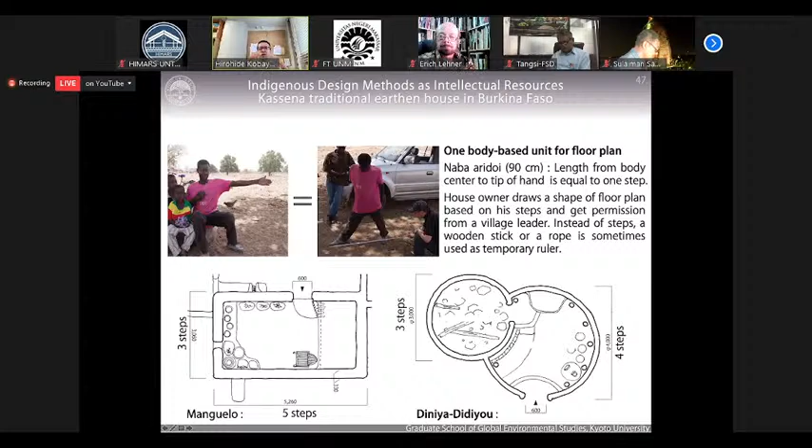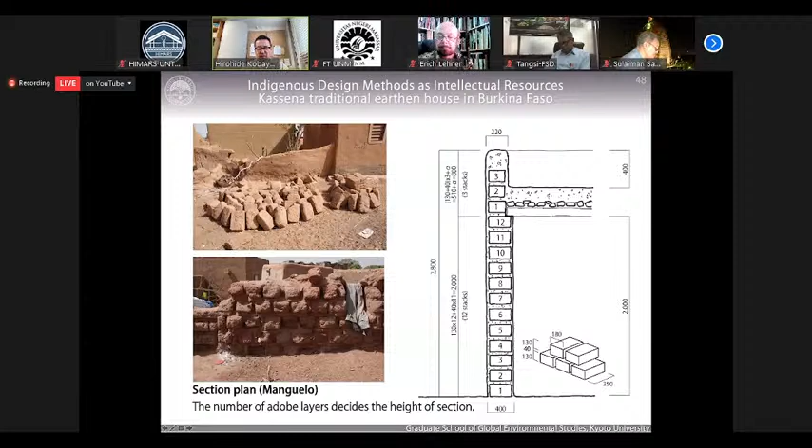But the height planning is different. They use the adobe brick. So they decide the height by how many layers of adobe brick, or how many layers of the mud ball. This is very intangible information, and sometimes difficult to clarify exactly the building technique, but they have very much knowledge about that in many places in the world.

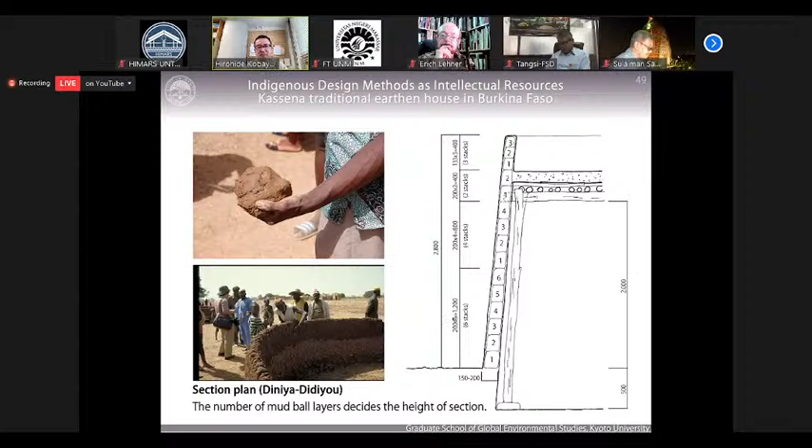So I want to conclude the significance of the research on body-based units of measurement. I want to emphasize that documentation and investigation are quite important. The indigenous building technique applying a body-based unit of measurement should be documented, because it is usually transferred through the opportunity of construction, which is very rare in our modern life.

So all of the construction technique is transferred through the opportunity of construction, but vernacular architecture is quite difficult to keep. The elderly people now are in their middle 70s, 80s. Thinking about 10 years later, this information will definitely disappear. That's why this kind of information should be documented by researchers, I think.

And also, other researchers should investigate indigenous building techniques, because it may be linked across all areas where we have building culture. We can find out so many similarities in how to apply the body-based unit to construction. That's why this is a very interesting topic, a research area of building culture, wooden culture. So yes, we should continue to do research about this topic.